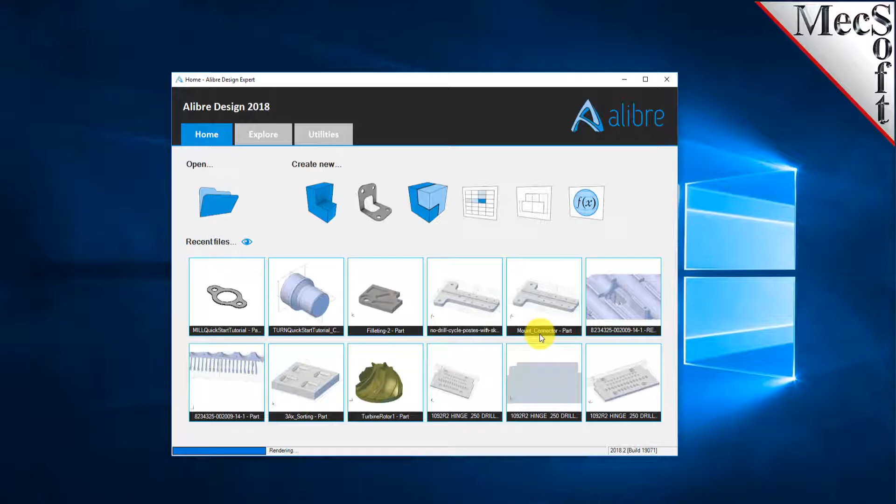To launch the AlibreCam Mill module, select the Add-ons tab from the ribbon bar, and you will observe an entry called AlibreCam. Selecting this button will display the AlibreCam main menu, from which one of the AlibreCam modules can be chosen. Select Mill to load the Mill module.

You will see the machining browser displayed on the left in a separate tab, labeled AlibreCam, next to the Design Explorer tab. You can also resize the height and width of the browser, making sure that all of the command icons and menus are easily accessible.

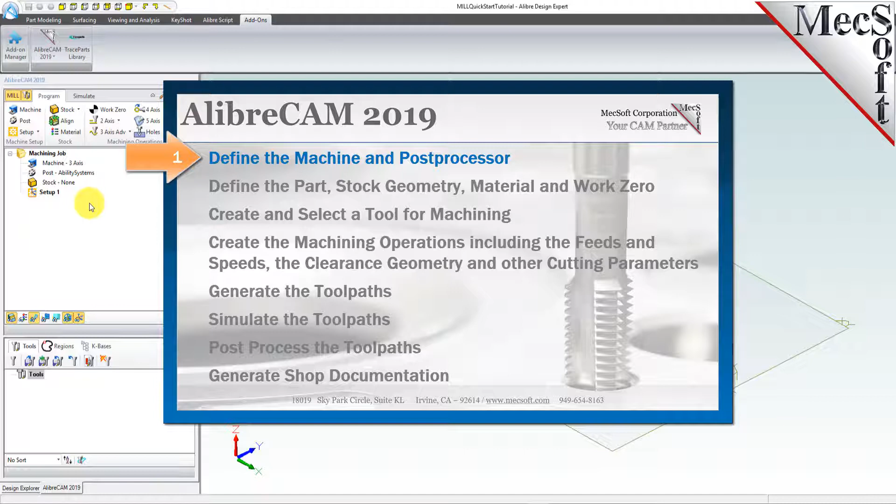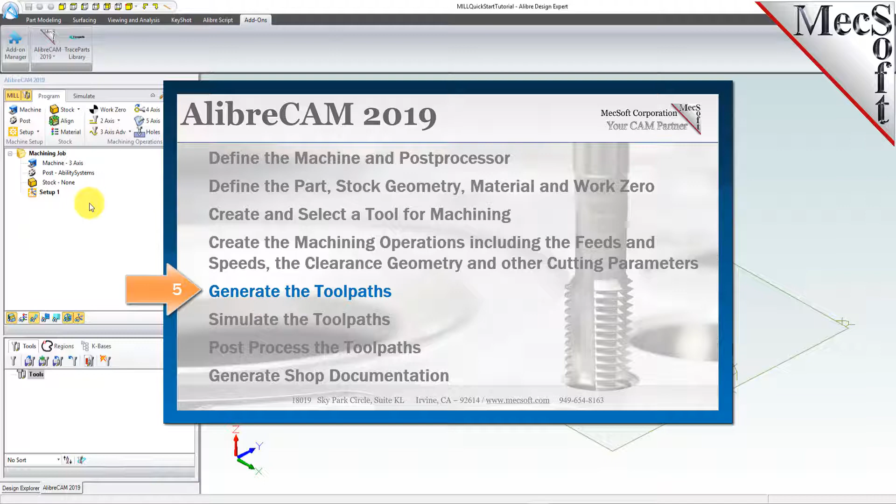We will perform the following basic steps in machining this model. First, we'll define the machine and the post processor to use. Then, we'll define the setup, including stock geometry, material, and work zero. Then, we'll create and select a tool to use for machining. We'll create the machining operations, including the feeds and speeds, the clearance geometry, and other cutting parameters. Then we'll generate the tool paths, simulate the tool paths, post-process the tool paths, and generate shop documentation.

Let's start by defining the machine and the machine tool coordinate system to use for this job. From the Program tab, select Machine to display the dialog. Under the Machine Tool Coordinate System tab, select the World Coordinate System button. By default, the MCS, or Machine Coordinate System, is already aligned with the WCS, or World Coordinate System, so this step is not required for this part.

Now select the Machine Tool Definition tab. Under Machine Type, set Number of Axes to 3 axes. Pick OK, and notice that the machine type now appears under the machining job in the machining browser.

Next, we'll define the post processor. From the Program tab, select Post to display the dialog. For the current post processor, select Haas from the list of available posts. Then set the Posted File extension to NC. Other file extensions are available depending on your machine requirements. Pick OK and notice that the post type now appears under the machining job in the machining browser.

Now, let's define the machining setup. If there is no setup one listed under your machining job, the system automatically creates one when a work zero or an operation is generated. However, by default, the MCS, or Machine Coordinate System, is already aligned with the WCS, World Coordinate System, so this step is not required for this part. However, in production, you can have multiple setups and assign different machining orientations for each.

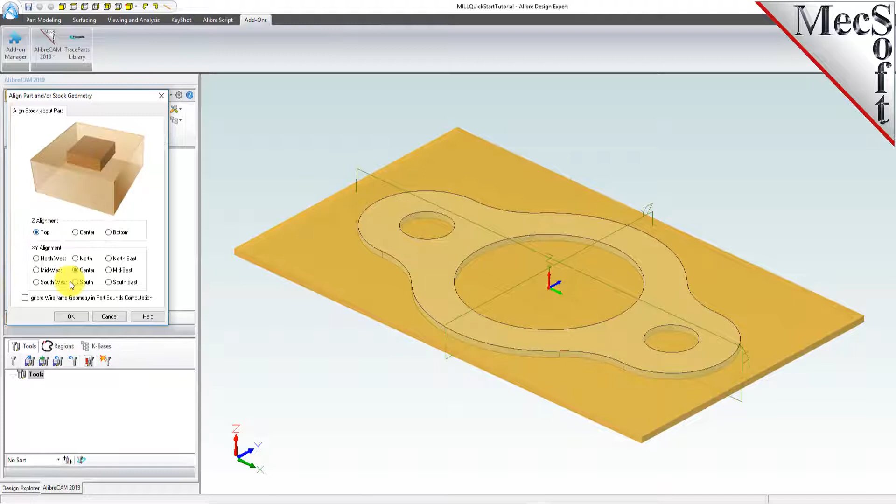If the stock does not display on the screen, select the Stock Visibility icon located at the base of the machining browser. Once the stock model is created, you can move it in alignment with the part if needed. From the Program tab, select Align to display the dialog. For Z alignment, select Top, and for XY alignment, select Center, and then pick OK. The stock is now aligned to the center of the part in the XY and the top of the part in Z.

Next, we'll set the material for the stock geometry. From the Program tab, select Material to display the dialog. For material, select Wood from the list of available materials and then pick OK. The material texture is displayed in the Stock Simulation window.

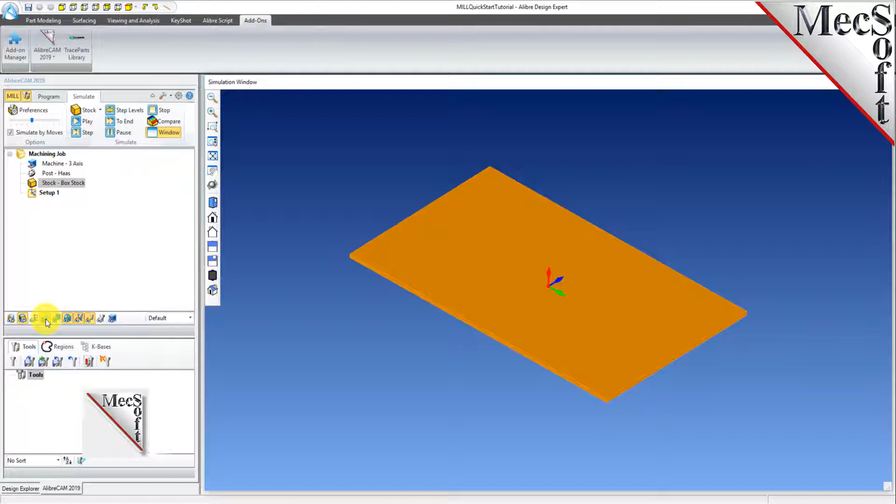Select the Simulate tab and then pick Window to open the stock simulation window. If the material texture does not display on the stock, select the Material Texture Visibility icon located at the base of the machining browser. Now select the window icon again to close the stock simulation window.

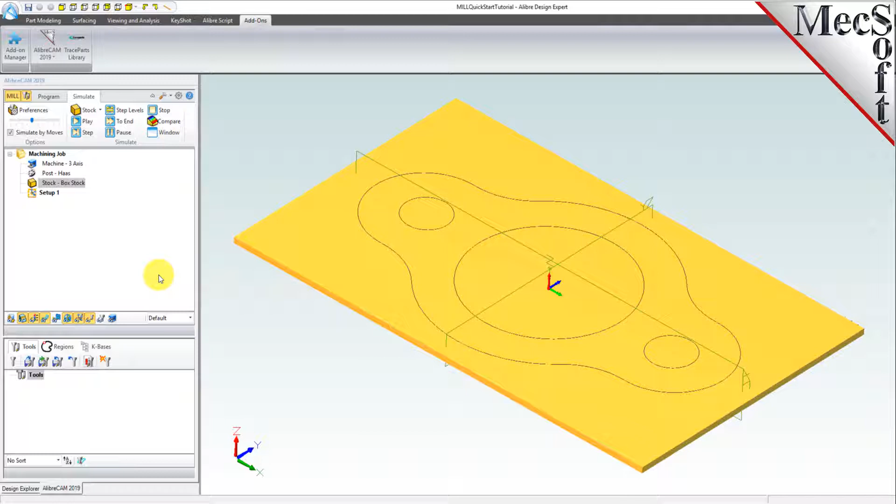Now that the stock is aligned to the part geometry, in this step we will establish the work coordinate origin. This location defines the 0 point from which all toolpath points are interpreted by the controller. From the Program tab, select Work Zero to display the dialog.

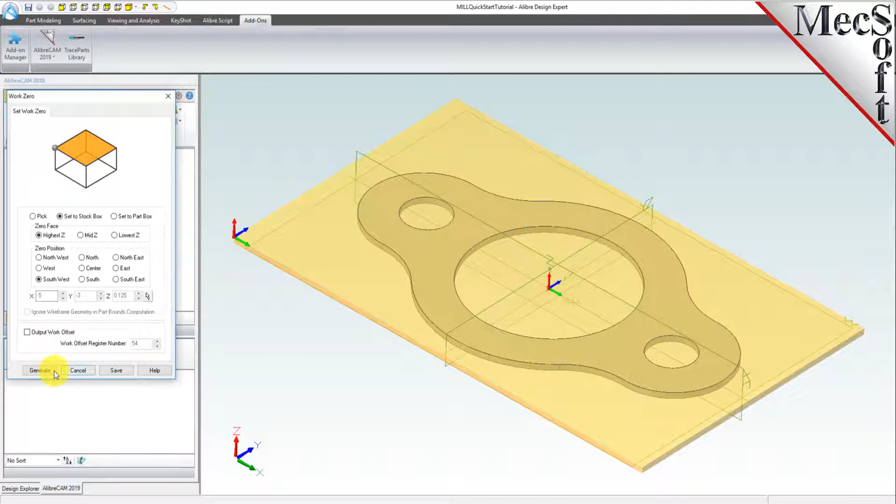Then select Set to Stock Box. Then set Zero Face to Highest Z and Zero Position to Southwest Corner. This sets the machine home to the top of the stock material and the southwest corner of the stock geometry. Pick Generate and notice that the MCS is translated and that the Work Zero now appears under Setup 1 in the machining browser.

To machine the part, we will now create a 1/2 inch flat end mill. Next to the Program tab at the top of the machining browser, locate and select the Tools Machining Objects button. Selecting this button toggles the machining objects lower portion of the browser on and off. Then locate the Tools tab and pick the Create Edit Tools icon.

Select the Flat Mill tool icon. Then set the tool name as Flat Mill 0.5 and the tool diameter to 0.5. Under the Properties tab, set Material to HSS and set the tool number to 1.

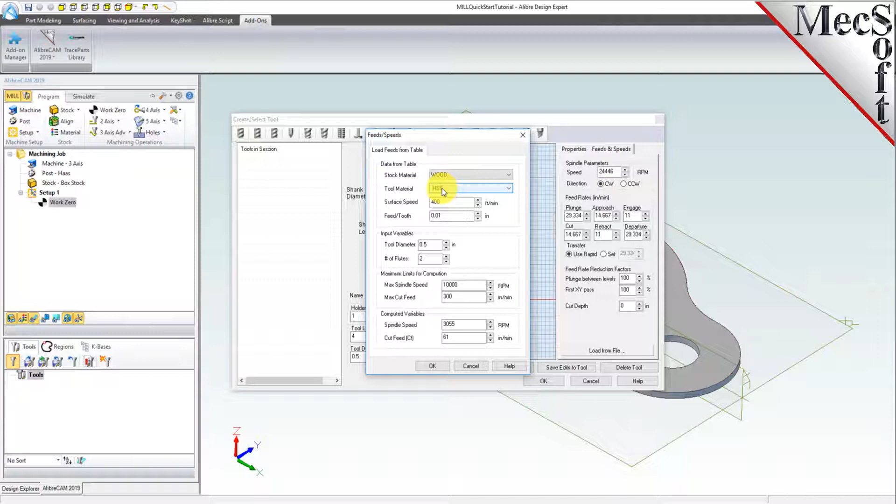Now switch to the Feeds and Speeds tab and pick Load from File to display the dialog. From here, set Stock Material to Wood and Tool Material to HSS. Pick OK and the computed cut feed rate and spindle speeds are transferred to the Speeds and Feeds tab of the Tool dialog. Now pick Save as New Tool.

The tool is created and listed under Tools in Session on the left. Pick OK to close the dialog. Notice that the new tool is also listed under the Tools tab of the Machining Objects browser.

Now we're ready to create our first profiling operation. From the Program tab, select 2-axis and then Profiling from the menu of 2-axis operations. This will display the 2 1/2 axis profiling operation dialog. From the Control Geometry tab, pick the Select Curve Edge Regions button. The dialog is minimized and you are prompted to select a sketch or face edge for machining.

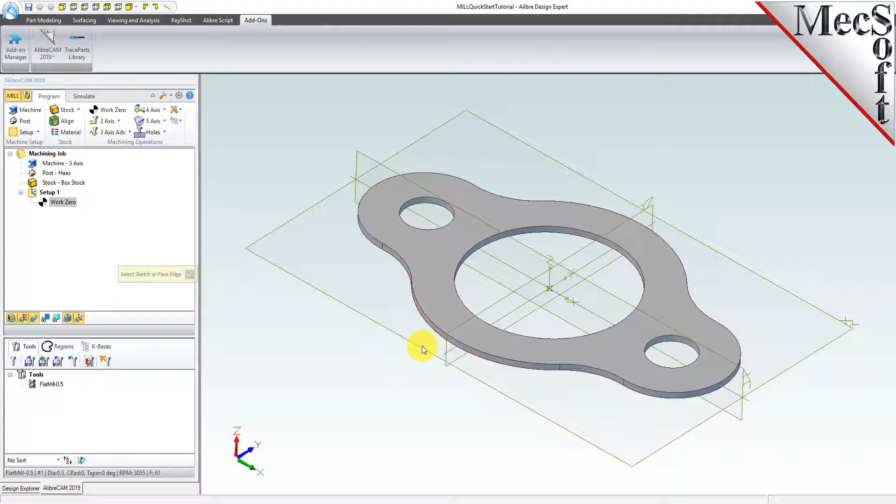We will now select the surface edges of the 3 inside hole features. While pressing the Shift key, select the first hole by clicking near its upper surface edge. Now, while the Shift key is still pressed, select the similar edges of the 2 remaining holes and then select the checkmark icon to complete the selection.

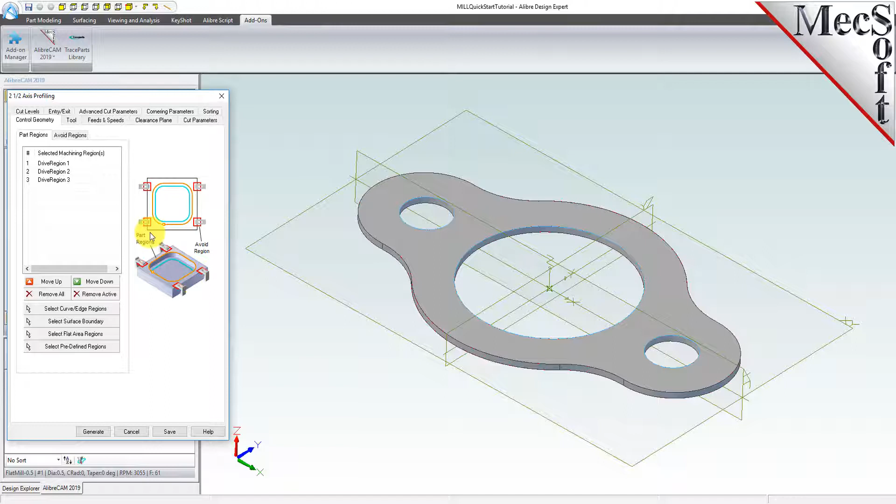The 2 1/2 axis profiling dialog comes back up, displaying the selected drive regions. They are also highlighted on the part. Notice that selecting a drive region from the list highlights the corresponding surface edge curve on the part.

Now we switch to the Tool tab of the dialog. Select Flat Mill 0.5 under Tools. The 0.5 inch flat end mill is now selected as the active tool. Note that the tool parameters of the currently active tool are always displayed in the status bar at the bottom of the Machining Objects browser.

Now switch to the Feeds and Speeds tab. Then pick the Load From Tool button. The system will retrieve the feeds and speeds parameters that were set when the tool was created and associate them with the current operation. Next, we'll switch to the Clearance Plane tab.

Set the clearance plane definition to Automatic and the Cut Transfer method to Clearance Plane. In the automatic mode, the system will determine a safe height for locating the clearance plane. Setting Cut Transfer to Clearance Plane will force all transfer moves to be performed in this computed clearance plane. When this dialog is active, the clearance plane is shown on the graphic screen.

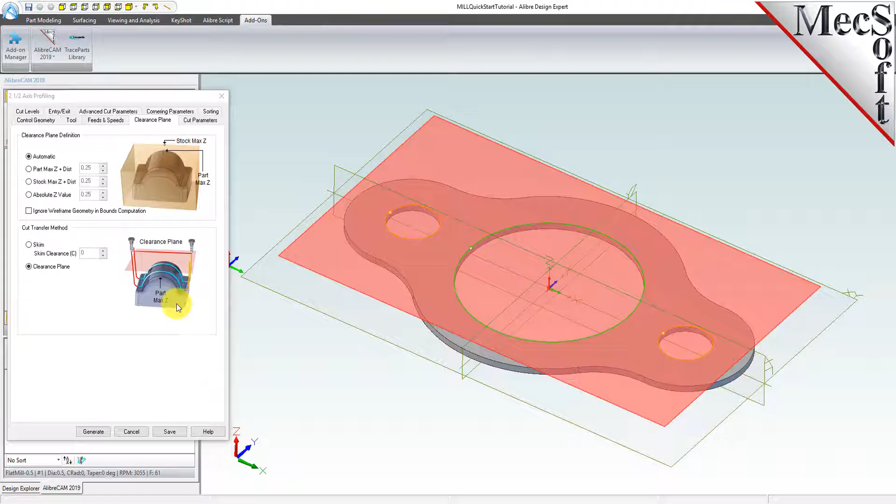Now we switch to the Cut Parameters tab to control the cutting. Set the stock to 0. This means that we will not be leaving any thickness on the part after machining. Under the Cut Start Sides section, check the box next to Use Outside Inside for Closed Curves, and then select inside.

Alternatively, you could use the Determine Using 3D Model option. In this case, the system would use the 3D model to determine which side of the curve to place the cutter for machining. Now, select the Cut Levels tab and set Location of Cut Geometry to At Top.

Enter 0.125 for the total cut depth. The cut depth is always set as an absolute value. This automatically sets the rough depth and rough depth per cut to 0.125.

Next, we select the Entry/Exit tab. Entry/Exit parameters control how the cutter will engage material as it begins cutting and how it leaves the material as it completes cutting. Set entry and exit motions to none.

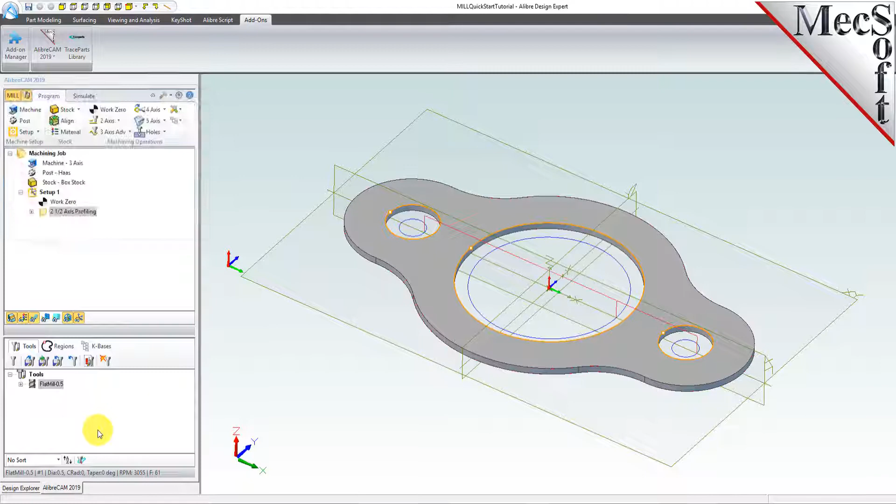Now pick Generate. The 2 1/2 axis profile toolpath is generated and the operation is listed under Setup 1 in the machining browser. The toolpath is also displayed in the graphics screen. Note that the display of the toolpath in the graphics screen can be turned on and off by selecting the toolpath visibility icon located at the base of the machining browser.

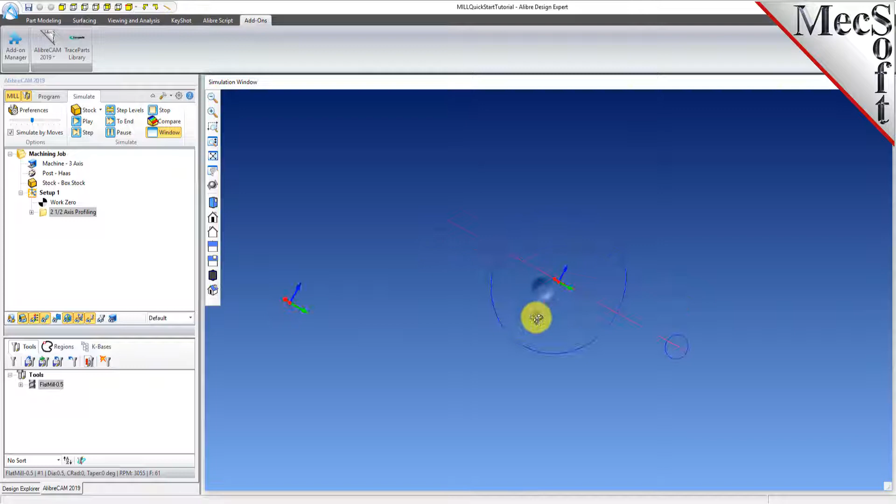The new toolpath can now be simulated to display the in-process stock model. Switch to the Simulate tab at the top of the machining browser. Pick Window to open the stock simulation window. Under Preferences, uncheck Simulate by Moves and adjust the slider to set the simulation speed and then select Play from the Simulation tab. Additional simulation controls are available on the menu, such as stop, pause, etc.

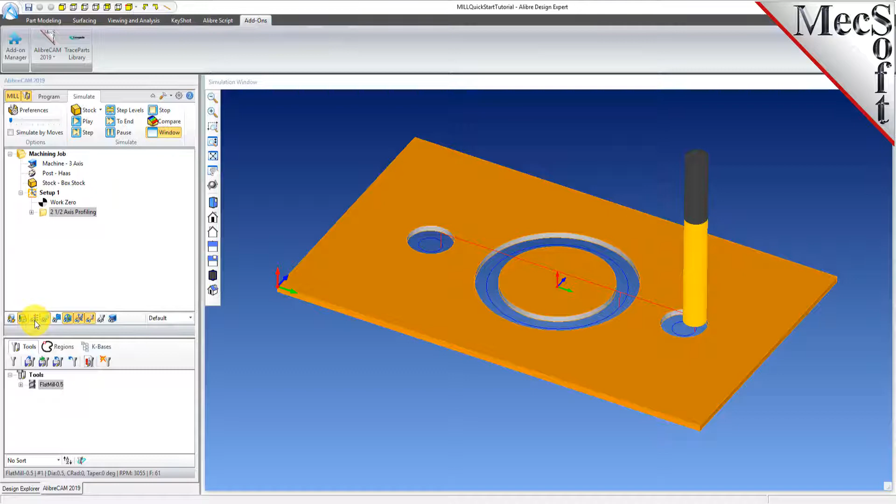To view the cut model with textures applied, select the Material Texture Visibility icon located at the base of the machining browser. Now, we will turn our attention to machining the outer profile of the part. Again, we will create a simple profile toolpath, this time around the outer periphery of the part. First, close the stock simulation window from the Simulate tab. Switch to the Program tab in the machining browser.

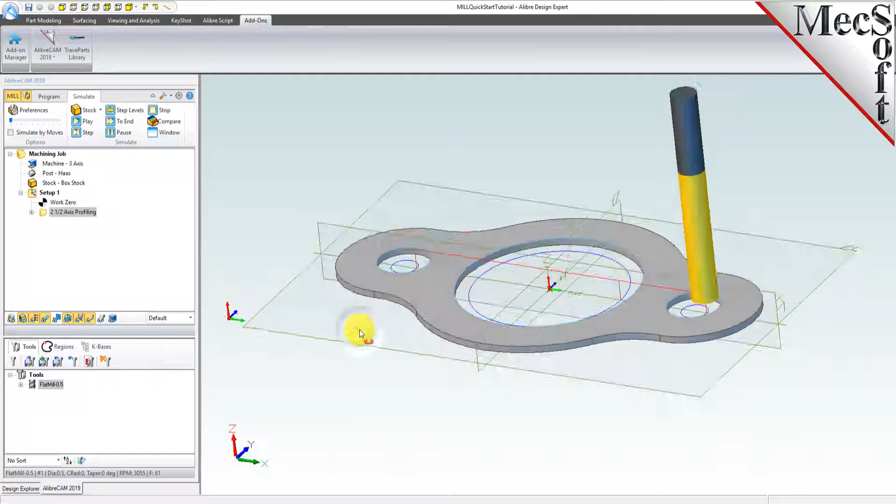Select the 2 1/2 axis profiling operation we just created. Right-click on the selected operation and select Copy. Now, right-click again and select Paste. This creates a copy of the operation and places it below the original in the machining browser. Now, right-click on the second operation and pick Edit to adjust its parameters.

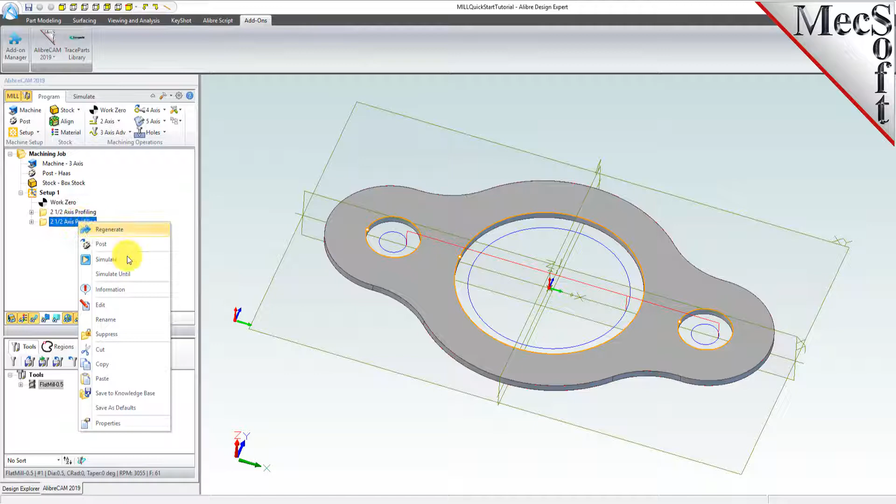Pick Remove All under the Control Geometry tab. From the Control Geometry tab, pick the Select Curve Edge Regions button. While holding the Shift key down, select each of the edges that form the outer profile of the top surface, and then pick the checkmark icon to end the selection.

Now switch to the Cut Parameters tab and change the Cut Start Side to Outside. We'll accept all of the remaining parameters and then pick Generate. The new 2 1/2 axis profile toolpath is generated and displayed on the graphic screen. Now, we'll select the 2 1/2 axis profiling operation we just created, select the Simulate tab, launch the stock simulation window, and then pick Play.

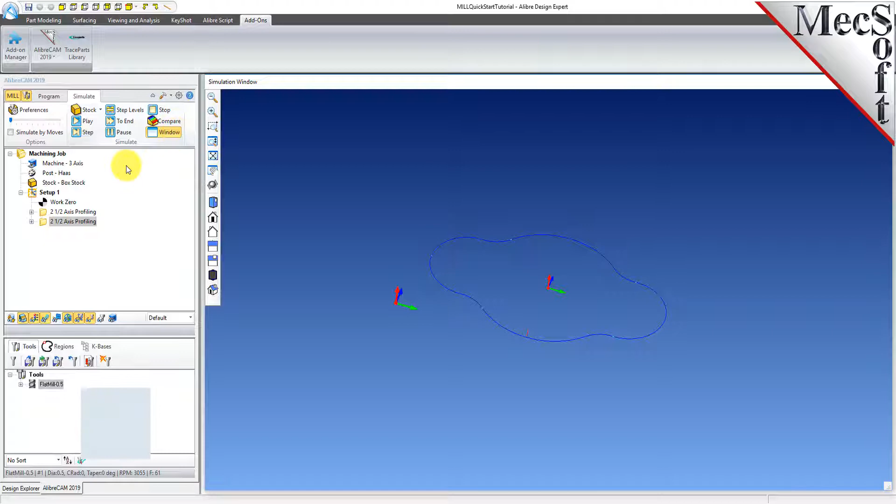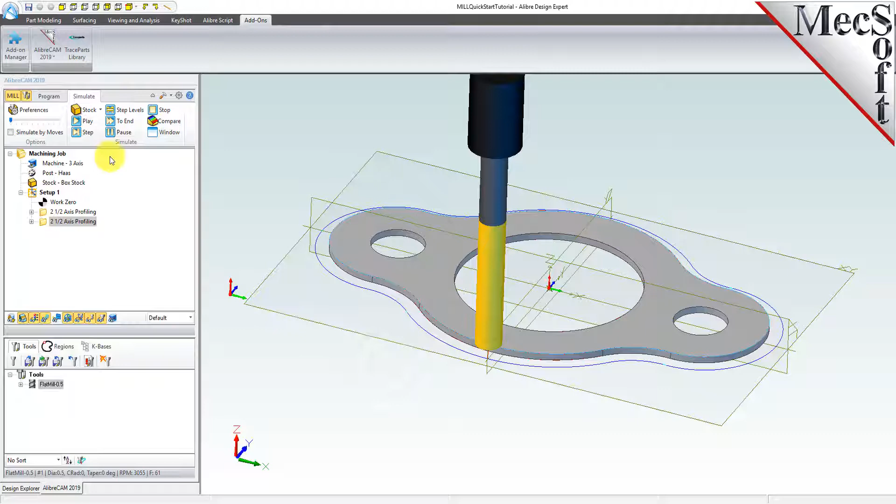Now, with the toolpaths complete, we're ready to post-process to an output text file containing G-codes that can then be sent to the machine tool to actually machine the part. First, close the stock simulation window from the Simulate tab. Select Setup 1 from the machining browser and right-click and select Post. This will post all operations created under the setup.

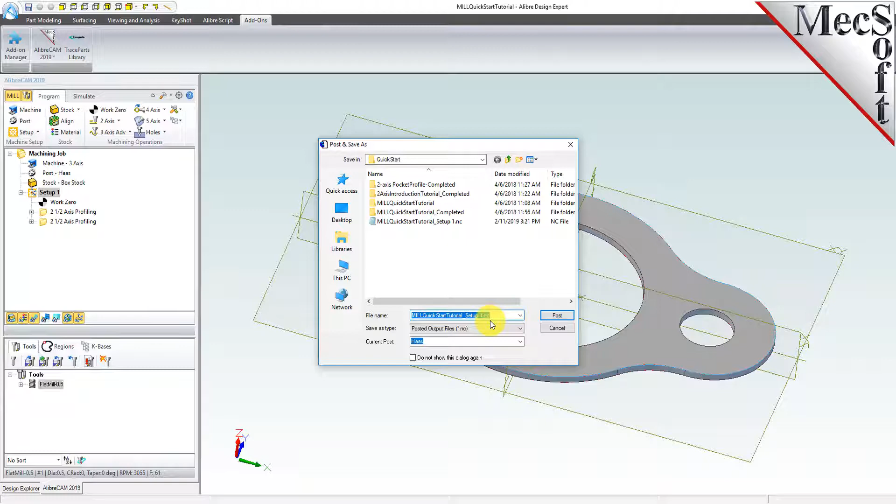By default, the part file name and the setup name are appended for the G-code file name. Also by default, the posted G-code file is saved in the folder where the file was last saved. Now pick Post and the G-code file is displayed in Notepad where it can be viewed or edited manually. Now close Notepad. At any time, you can create an informational report of your machining operations.

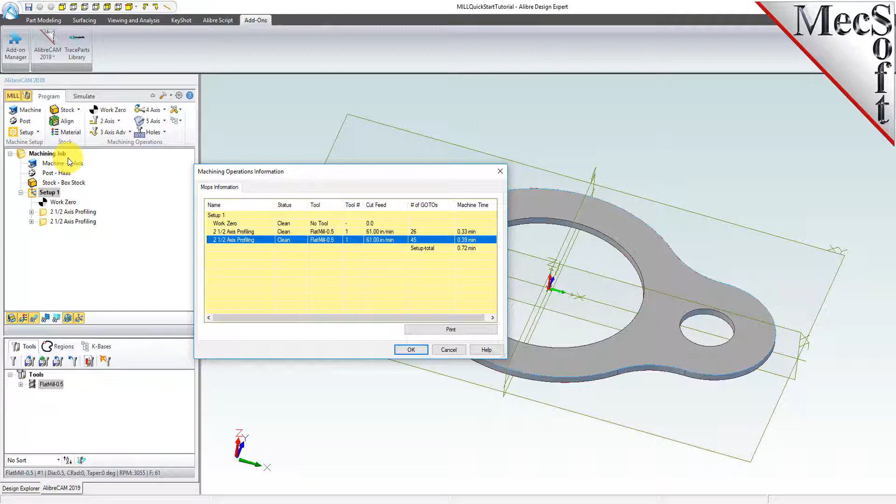Switch to the Program tab in the machining browser. Select Setup 1. Right-click and select Information to display and print the report. This dialog provides an estimate of the machining time required for the operations in the setup. You can perform the same right-click sequence on the machining job to determine the estimated machining time for all setups. Now pick OK to close the information dialog.

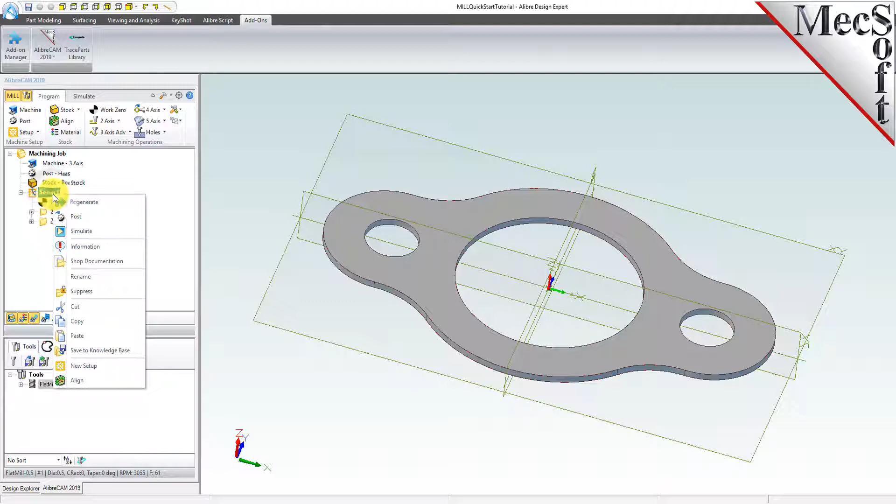You can also create a setup sheet by generating a shop document. This is typically used to instruct machine operators on how to set up and machine the part on the CNC machine. Select Setup 1. Right-click and select Shop Documentation. Select Template 1 and then click Save. This creates an HTML-based shop document that can be viewed in a web browser. You can perform the same right-click sequence on the machining job to generate shop documentation for all setups.

This completes the Mill Quick Start tutorial for the AlibreCAM Mill module.